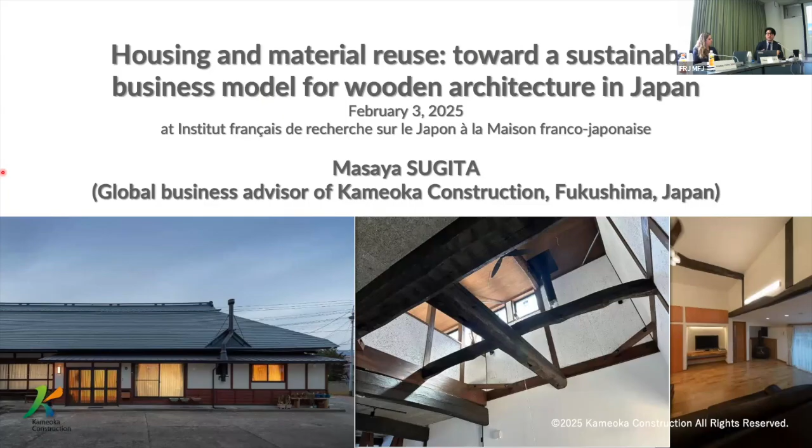Every time I travel from the countryside to the city, I'm always amazed by the dramatic changes in the landscape and cityscape. It's a powerful reminder of how more and more people and economic activities are being drawn to urban areas. I had a similar experience last November during my trip to France. As I traveled on the TGV, I couldn't help but notice the stark contrast between the French countryside and the busy capital Paris. In Japan, the migration from rural areas to cities continues to be one of the key factors behind the increase in vacant houses and the need for their reuse, which is what I'll be discussing with you today.

In today's presentation, I'd like to begin with introducing kominka, traditional wooden houses, and kozai, used wood materials. I will then briefly explain the challenges in wooden construction and potential solutions in Japan. After that, I will introduce our company and some case studies from Japan and Taiwan, along with our ongoing activities in France. Finally, I'll conclude by sharing our vision for sustainable wooden construction. So let's dive into the topic.

At first, I want to explain what a kominka is. There is no strict definition of a kominka, but it generally refers to a traditional Japanese wooden house built using a post and beam construction method, typically constructed before the Building Standards Act was enacted in 1950. So many of the houses referred to as kominka are generally 75 years old. The structures of kominka often feature natural materials and techniques such as post and beam construction, as I said, intricate joinery, stone foundations, earth walls, and tiled or thatched roofs.

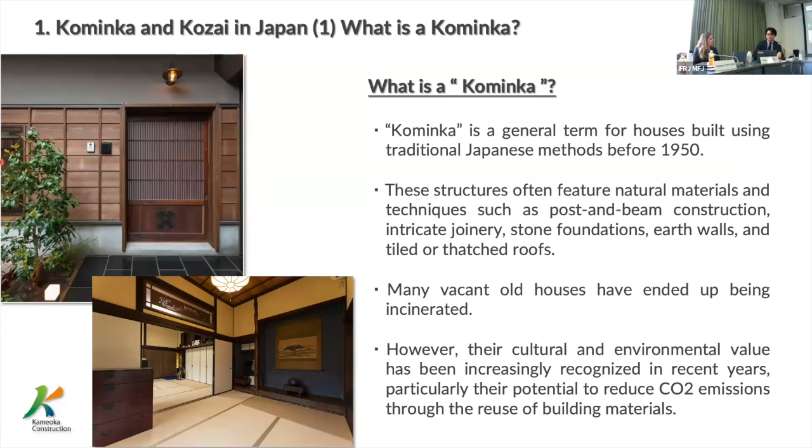In Japan, kominka are not actively traded as second-hand houses for some reasons that I will explain later. As a result, many uninhabited kominka have ended up being incinerated. However, in recent years, their cultural and environmental value has been increasingly recognized, especially regarding their potential to reduce CO2 emissions through the reuse of building materials. As a result, the number of kominka being relocated or renovated for use as housing or commercial facilities is steadily rising.

And what is a kozai? Kozai refers to reclaimed wood that retains enough quality for reuse. By reusing kozai, we can significantly reduce energy consumption and CO2 emissions that would otherwise arise from waste disposal and the production of new building materials. Kozai can be repurposed for various uses, such as structural elements like posts and beams, decorative interior materials, fittings such as sliding doors, custom-made furniture, and even secondary wood products like art objects and tableware.

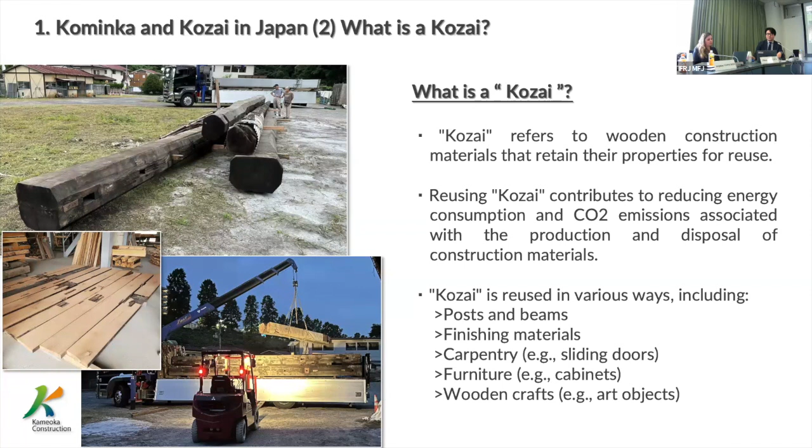Ideally, all kominka and kozai would be reused within Japan. However, there are significant social challenges that make this difficult to fully achieve. In Japan, the number of uninhabited houses is steadily increasing, especially in rural areas due to the decline in population and the ongoing trend of urban migration.

As of 2023, approximately 9 million uninhabited houses were recorded, with many of them in poor condition. Unfortunately, a large number of these houses are demolished and burned because their owners can no longer maintain them. This not only results in the loss of valuable historical and cultural building materials, but also contributes to increased CO2 emissions. Some of you may be wondering why old houses are not actively traded as second-hand homes in Japan.

There are several reasons spanning from market preferences to customer expectations and industry challenges. First point is customers' preference for new homes. In Japan, most customers prefer newly built houses and apartments. Unlike Europe or the United States, where there is a cultural appreciation for the charm and value of antique wooden houses, Japan does not necessarily share the same perspective.

Second point is rising seismic standards. As you know, Japan is prone to earthquakes. The country regularly updates its seismic standards. For example, Japan has undergone 3 major revisions to its earthquake resistance standards over the past 60 years, in 1971, 1981, and 2000. Each of these revisions was made in response to the damage caused by the most recent major earthquakes. Older homes that no longer meet these standards are often replaced, leading to demand for new constructions.

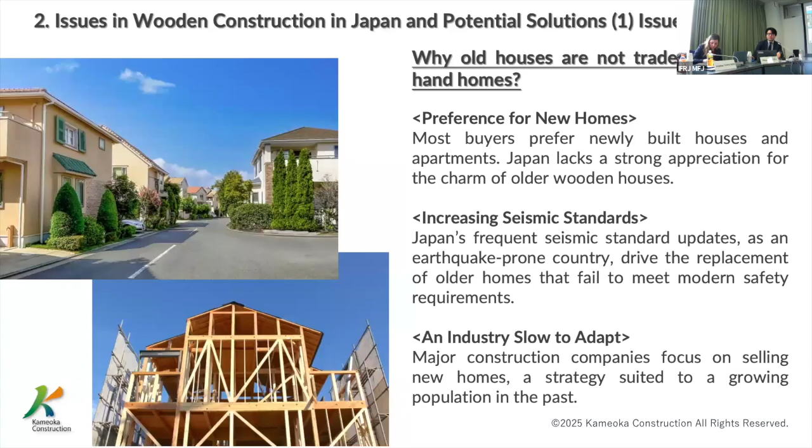Another important consideration is that the value of used homes can drop in a short period of time in Japan. Wooden houses in Japan physically last over 50 years, with high-quality ones exceeding 100 years with proper maintenance. However, their real estate value often declines to zero within 20 or 30 years due to consumer preferences and market dynamics. And the legal depreciation period for wooden houses in Japan is set at 33 years for personal use and 22 years for commercial use, which defines the duration for tax-related depreciation.

However, this period often underestimates the actual physical durability of wooden houses. Due to this background, old wooden houses are frequently undervalued in real estate appraisals. Their market value often drops to nearly zero after 20 years, despite their physical durability typically exceeding 50 years. This reflects a disconnect between appraisal practices and the true longevity of these properties.

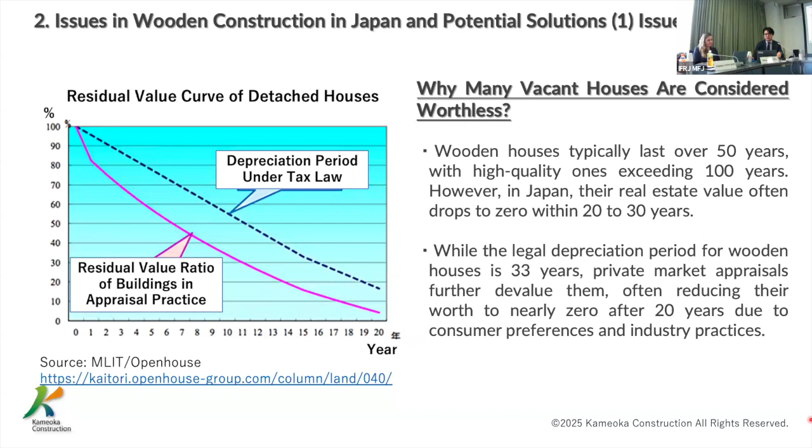Additionally, there are several technical challenges when it comes to obtaining high-quality kozai from demolition sites. It may not be particularly difficult to simply dismantle a wooden house on site, and it is relatively easy to remove and reuse small items such as sliding doors and fittings. On the other hand, relocating a kominka or reusing structural parts of it as kozai requires careful planning by experts. This involves considering the reuse design plan before the dismantling process. And of course, it comes at a higher cost.

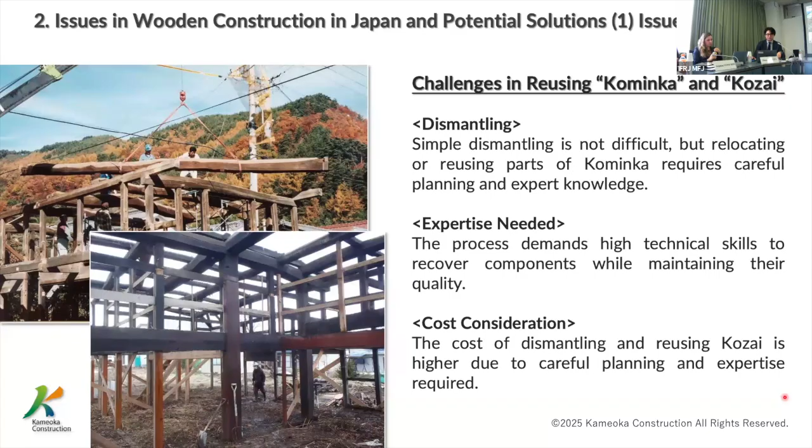The dismantling process involves recovering various structural components while preserving their integrity and quality. This is not a task that can be carried out by just anyone. It requires a high level of technical expertise and knowledge. To address these challenges, we are focusing on the following solutions. First, developing demolition and preservation methods. It is essential to establish effective methods for dismantling and preserving old houses and materials, ensuring their quality is maintained.

Second, renovation for modern living. The goal is to redesign these spaces to incorporate contemporary design, improve insulation, and make them suitable for modern lifestyles. This approach is a standard practice in renovation. Third, incorporating kozai into new designs. We aim to repurpose kozai materials, which have been part of kominka for over 100 years, by integrating them as decorative elements in modern architectural spaces. These materials are versatile and can be used not only for residential purposes, but also as decorative features in offices, meeting rooms, banquet halls, cafes, and accommodation facilities, and so on.

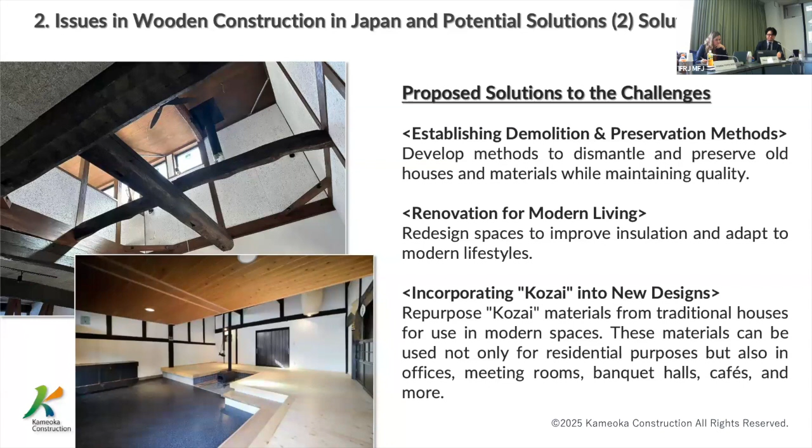It's also important to raise understanding of people concerned from a long-term perspective, considering the scarcity of kozai and promoting sustainability across stakeholders and generations. Kominka often use rare wood species like 150-year-old zelkova, which are no longer available in Japan. And managing certain tree species requires over 200 years of forest stewardship, passed down through multiple generations. However, post-1945 forestry reforms in Japan introduced the use of fast-growing cedar for 30-year cycles. Cedar is also one of the main causes of hay fever, pollen allergy, in Japan. Meanwhile, the widespread use of inexpensive imported timber has made long-term forest management more challenging in Japan.

A few years ago, I visited a logging site for Aomori hiba, which is a local type of cypress, with a friend in Aomori Prefecture, who is both an architect specializing in wooden architecture and operates a timber store as a family business. I was amazed by the sight of timber over 200 years old, stacked in abundance, as shown in the photo below.

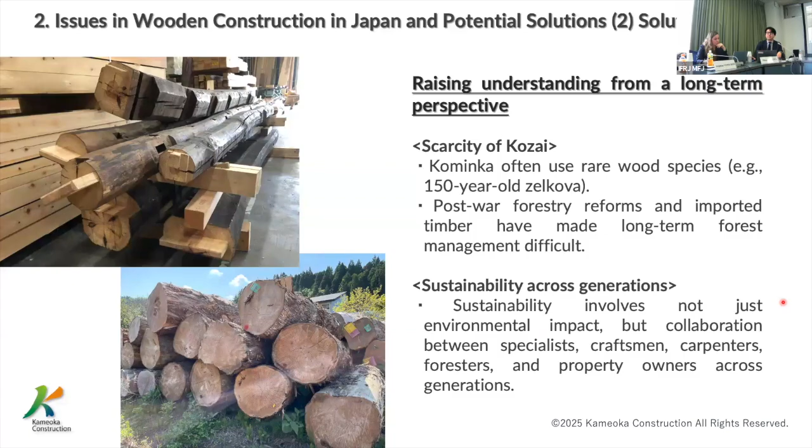These are examples of kominka renovations, repurposing, and the use of reclaimed kozai for interiors in Japan. You can, of course, renovate kominka for use as a primary or secondary residence. And reclaimed kozai materials are also used for interior renovation of apartments. As a commercial use, conversion into commercial spaces such as cafes, restaurants, or shops for food or various products is also available. As a hospitality use, you can repurpose it as hotels or hostels to accommodate domestic and international tourism. Our company specializes in relocating kominka, renovating them and reusing kozai in various projects.

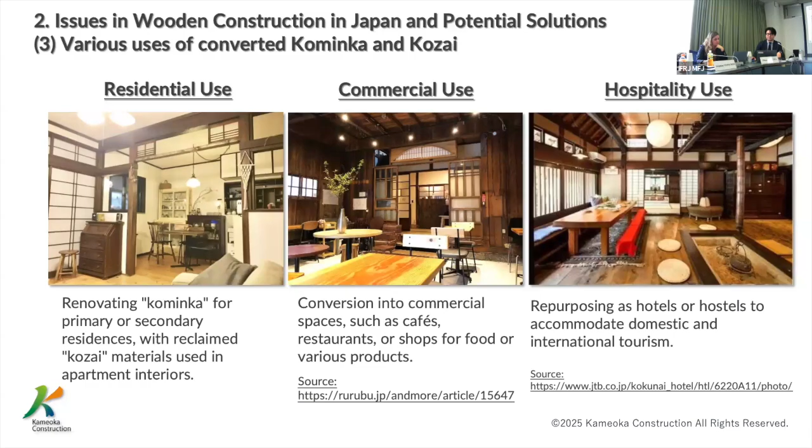Now, let me introduce our company. We, Kameoka Construction, are a construction company based in Fukushima Prefecture, Japan. Founded in 1968 as a civil engineering firm, we have grown into a general construction company, celebrating our 58th anniversary this year. When people hear Fukushima, many may remember the Great East Japan earthquake of 2011.

Although I joined the company after that event, I've heard many stories of how all the employees worked tirelessly, day and night, to repair buildings and support the community in the aftermath of the earthquake. Thanks to the generous support from around the world, including France, Fukushima has largely recovered and daily life has returned to normal. We will never forget this kindness and continue to live with the belief that it's now our turn to give back to others, both in Japan and globally.

We have made significant achievements in several key areas of construction, including the development of durable and earthquake-resistant wooden houses. We also worked on large-scale wooden and collective housing projects. Our portfolio includes the construction of health and social facilities, stores, and commercial spaces, as well as the repair and construction of public infrastructure. Additionally, we have been deeply involved in the rehabilitation and renovation of traditional kominka houses, as I said.

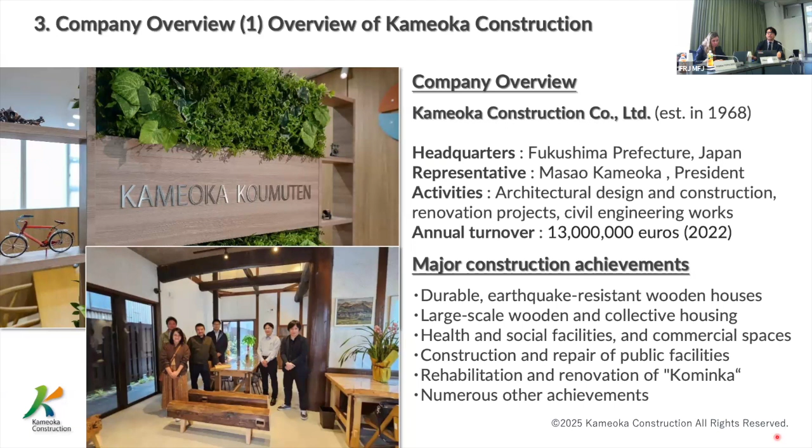Furthermore, as an initiative to recycle wood resources outside of construction, we are collaborating with a non-profit organization to recycle wood resources by turning discarded wood into chips, and discarded wood chips into thread and fabric products. Our goal is to establish a system to collect small wood pieces that can be used in construction and recycle them into these products. The foundation of our kominka project stems from the challenges associated with traditional Japanese houses, as discussed earlier.

In 2015, we became members of the National Association for the Rehabilitation of Kominka. Through this association, we gained valuable insights and connected with people from across Japan. This experience highlighted the urgent need to preserve kominka as an essential part of Japan's cultural heritage, ensuring that those traditional homes and their values are passed on to future generations. We also wanted to share this significant aspect of Japanese culture with the world, which led to the creation of our initiative.

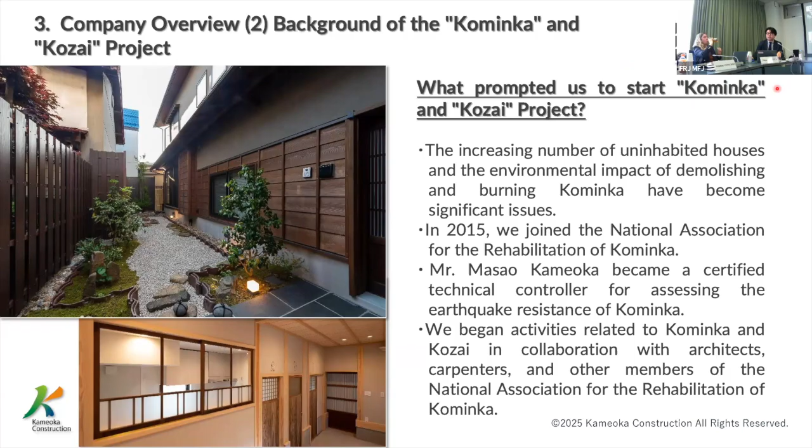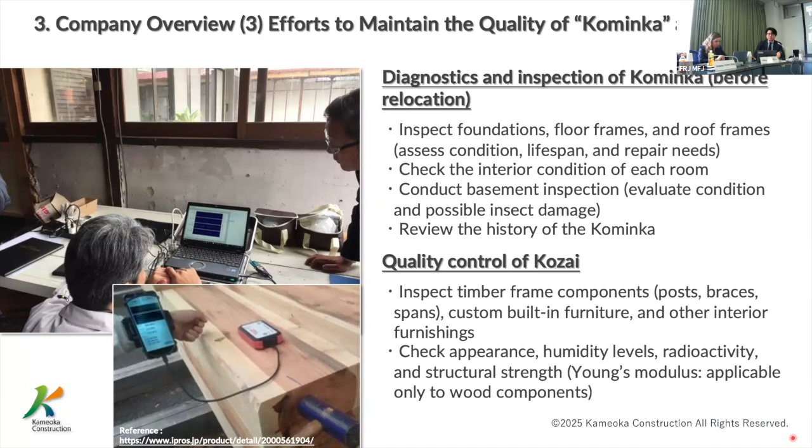Next, I'll share the initiatives we are taking to maintain the quality of kominka and kozai. First, we assess the condition of kominka by inspecting structural components, the interior and the basement. We also perform seismic evaluation for buildings that will be renovated or relocated. It's also important to understand the history of each house through interviews or documents to highlight its cultural significance and rarity. For kozai, we begin with visual inspection, then test its strength, moisture content, and radiation levels to ensure its quality. Next, I'd like to introduce how kominka and kozai can be utilized in terms of interior space, culture, and the environment.

The spaces created with kominka and kozai reflect the unique features of traditional Japanese architecture and interior design, blending aesthetic beauty with emotional depth. These spaces bring out the timeless charm of Japan's cultural heritage, providing a harmonious atmosphere that touches both the eyes and the soul.

The beauty of the interior style is evident through the use of kozai, which displays authentic marks of life from the past. The materials are natural, creating simple and elegant interiors with a perfect balance between light and shadow that highlights the beauty of both natural and artificial lighting.

The spaces are also deeply influenced by traditional Japanese aesthetics with elements inspired by wabi, which embraces simplicity and understated elegance, and sabi, which celebrates the beauty that comes from age. In terms of interior decoration, carpentry, and furniture, these elements evoke powerful emotions. The airy and tranquil spaces provide a sense of calm and openness.

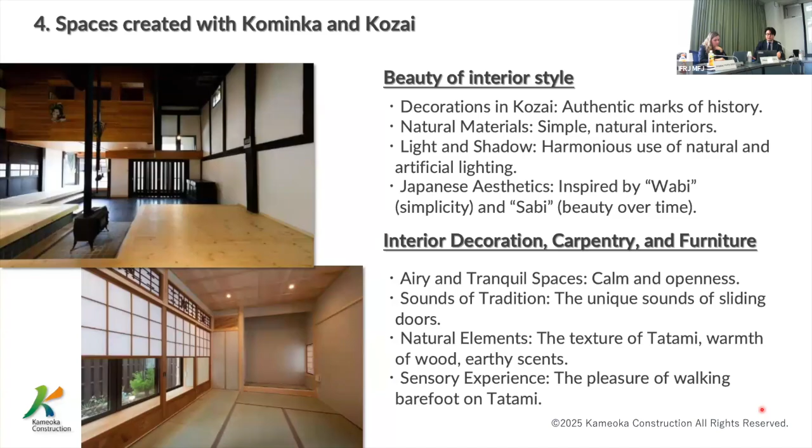There is a unique auditory experience as well, with the sounds of tradition created when sliding fusuma doors or shoji panels, like shh, shh. The natural elements come alive through the texture of tatami, the warmth of wooden floors, and the earthy fragrance of nature. And walking barefoot on tatami brings a pleasant sensory experience, further enhancing the connection with the natural environment.

This initiative creates a fusion of history and culture as people from different countries experience spaces made from over 100 years of history through woodwork and furniture. These spaces also serve as venues for cultural practices such as Japanese tea ceremonies, calligraphy, and flower arranging, providing unique opportunities to connect past traditions with present-day experience.

Furthermore, the reuse of kozai plays an essential role in reducing environmental impact. By repurposing kozai, we promote recycling, reduce dependence on industrial materials, and conserve energy. This sustainable approach not only minimizes environmental harm, but also supports the continuous cycle of resource use, contributing to a greener, more sustainable future.

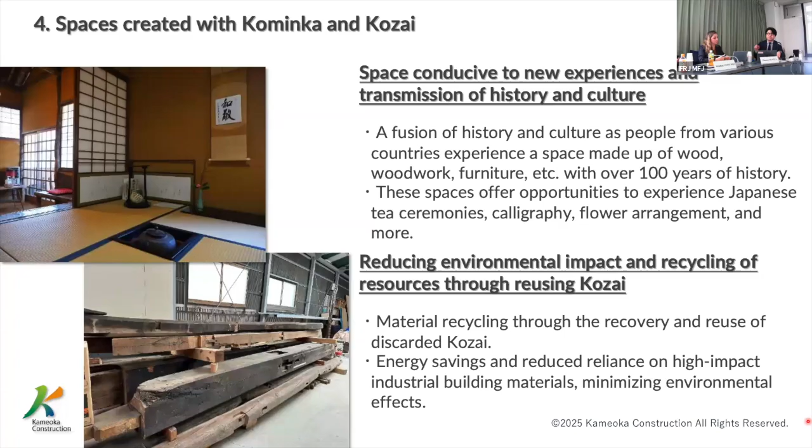Next, I'd like to introduce examples of our renovation projects involving traditional Japanese houses and interior remodeling using kozai. This is an example of a traditional house renovation we carried out in 2019 in Kitakata City, Fukushima Prefecture. The house, which was 155 years old before the renovation, had been home to more than 6 people across 4 generations.

The owner's requests included removing the steps inside the house, installing a wood stove in the living room, updating the plumbing, adding a new bedroom, and making improvements to enhance warmth during the winter. While preserving the unique charm of the traditional house, we created a comfortable living space tailored to modern lifestyles. Since this is a cold region, we also improved the insulation performance. Of the building's total floor area of 230 square meters, 130 square meters have been renovated.

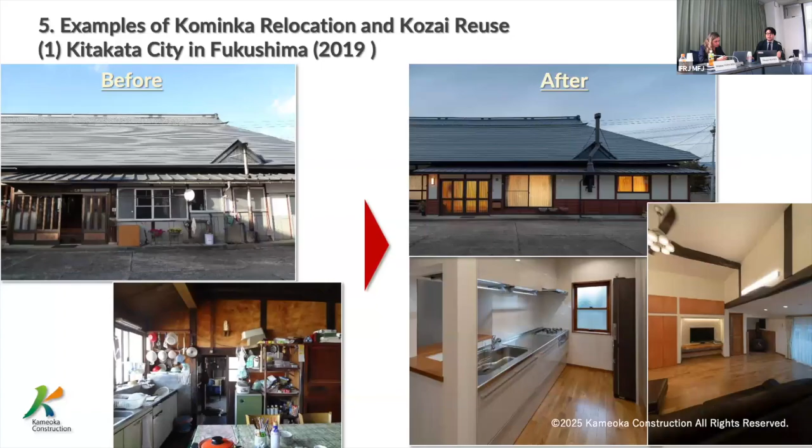Next, here is an example from Nihonmatsu City, Fukushima Prefecture. The house before the renovation was about 150 years old. The owner initially wanted to renovate the old house and contacted several other construction companies, but all they offered were proposals to rebuild it. After consulting with us, we successfully carried out the renovation. This project, which also included the garden, was based on the owner's love for gardening.

In Japan, as the population per household decreases, the demand for housing spaces is also shrinking, leading to a growing need for downsizing renovations. Downsizing not only makes it easier for owners to maintain and manage their homes, but it also helps improve energy efficiency and reduce renovation costs.

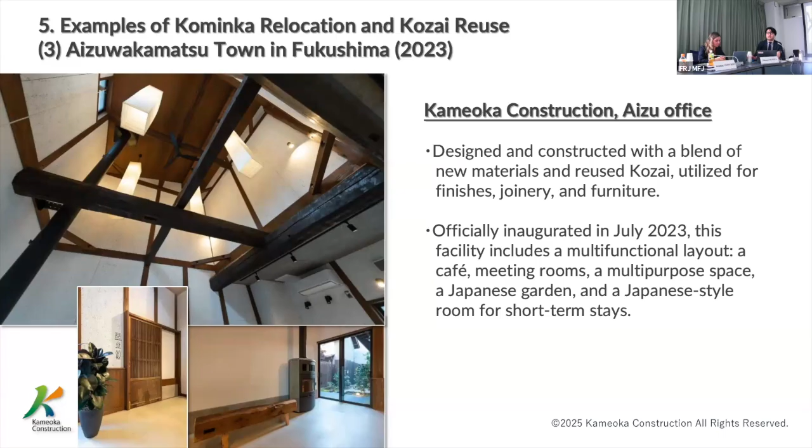This facility serves as an information hub for activities related to kominka, such as relocation and renovation. It also includes a cafe space where visitors can relax and enjoy their time. At the back of the building, there is a small Japanese garden, as shown in the picture on the left. Additionally, the second floor features a multi-purpose room that can be used for local community gatherings and other activities.

Accommodation is also available in the traditional Japanese house located behind the main building. It is available for rent on platforms such as Airbnb and Booking.com. We warmly invite you to stay when you visit Aizu.

Here is the construction of a wooden villa in Baoshan Village, Taiwan. It was designed with the following concepts. The villa harmonizes with the natural landscape where the mountains meet the farmland, inspired by the Satoyama concept. Satoyama refers to transitional landscapes between mountain foothills and farmland.

In addition, aged and textured kozai materials are carefully reclaimed and integrated into new construction projects. And the villa was built in collaboration with local builders in Taiwan, following detailed planning and design exchanges with accurate 3D data over the internet.

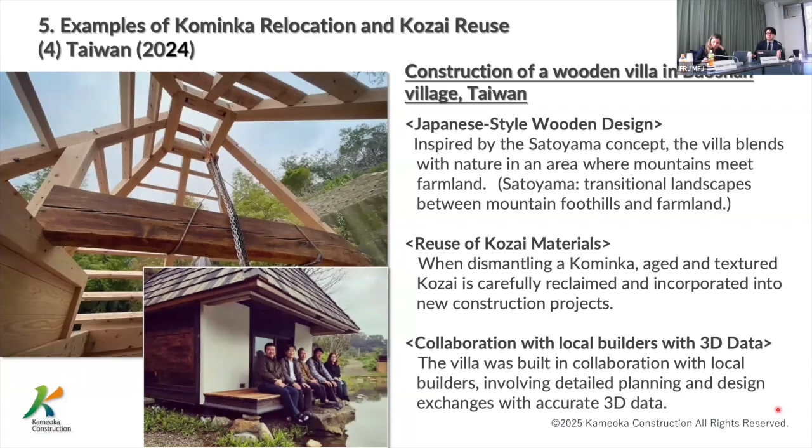Let me now share our current activities related to kominka and kozai in France. First of all, France and Japan share mutual respect and understanding of each other's history, culture, and art. Both nations value traditional woodworking and craftsmanship of carpenters and artisans, recognizing the importance of passing these skills to future generations.

Additionally, last November, we held a symposium in Paris focusing on sustainable wooden architecture. The Franco-Japanese symposium on wooden architecture, focusing on sustainable wooden architecture and the transmission of skills among carpenters and artisans, was held on November 9th, 2024 at the Japan Cultural Institute in Paris. The event received support from the Sasakawa Franco-Japanese Foundation and other sponsors.

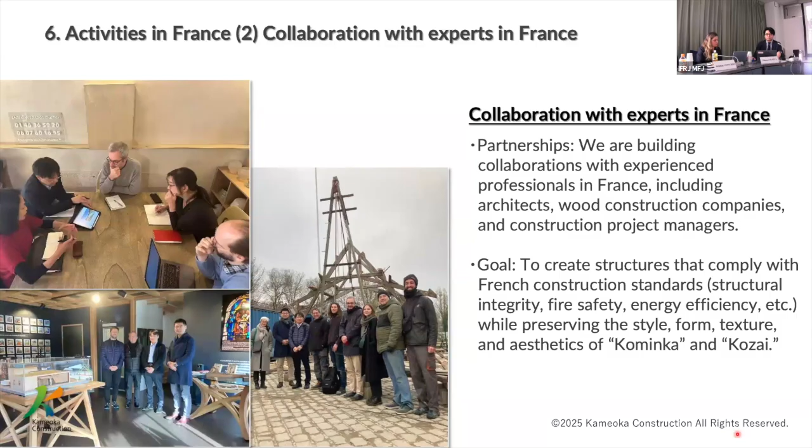Maritime transport via container ships generates significantly lower CO2 emissions per weight compared to air or truck transport. And the additional CO2 emissions from shipping kozai to France are minimal compared to the emissions produced when manufacturing new construction materials. We are also exploring the possibilities of partnering with furniture companies that frequently transport containers from Japan to France. When the amount of kozai to be transported is small, we consolidate the kozai into their regular containers to reduce both costs and energy consumption.

Furthermore, unused kozai in Japan is often incinerated, releasing CO2, as I said. By repurposing these materials in France, we can avoid these emissions, contributing to further CO2 reductions.

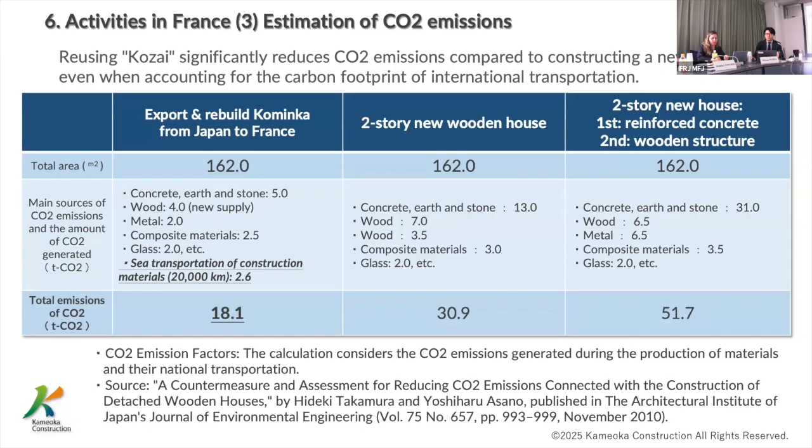Another important aspect of our activities in France is fostering cooperation between Japan and France to train the next generation of carpenters and craftsmen. In Japan, the number of craftsmen skilled in traditional wooden construction is steadily declining. This is due to the increase in non-wooden buildings and the aging of current artisans. Furthermore, the recruitment and training of young craftsmen to carry on these vital skills has been insufficient.

For example, during the relocation of kominka to France, Japanese craftsmen can collaborate with young French artisans and woodworking artists. This partnership not only helps preserve traditional craftsmanship, but it also inspires the younger generation to take an active interest in supporting the cultural heritage of both Japan and France. As a result, this collaboration creates a positive cycle, fostering greater appreciation and attracting new talent to the field.

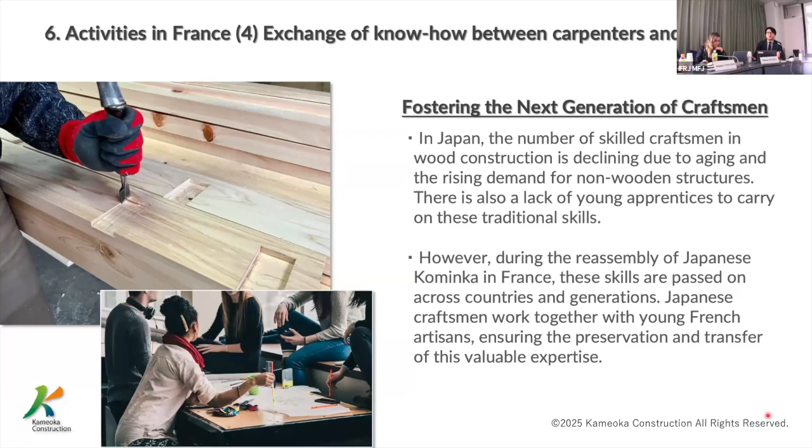In France, there are various ideas for reusing Japanese kominka and repurposing spaces made from kozai. For example, using the structure as a main or secondary home or vacation residence. Another option could be converting it into a tiny house. Additionally, the space can be used for commercial or hospitality purposes. Why not incorporate Japanese aesthetics into the interior design by using kozai?

Finally, I'll conclude by sharing our vision for sustainable wooden construction. First, circular use of wooden resources. We aim to achieve the reuse of wood materials through the relocation of kominka and the reuse of kozai, thus ensuring the sustainable cycle of wood resources. Second, reevaluation of wood construction. We are committed to reassessing and valuing the design, performance, and cultural significance of wooden architecture. This also includes enhancing their aesthetic and functional value to meet modern needs.

Third, reducing environmental impact. By preventing the incineration of kozai and promoting its reuse, we aim to save energy and reduce CO2 emissions, contributing to the global efforts in environmental preservation. Fourth, vocational training and knowledge transfer. We believe in training and developing skilled carpenters and craftsmen. This process will pass down valuable traditional skills, improve their income, and elevate their social status, ensuring the sustainability of the craft.